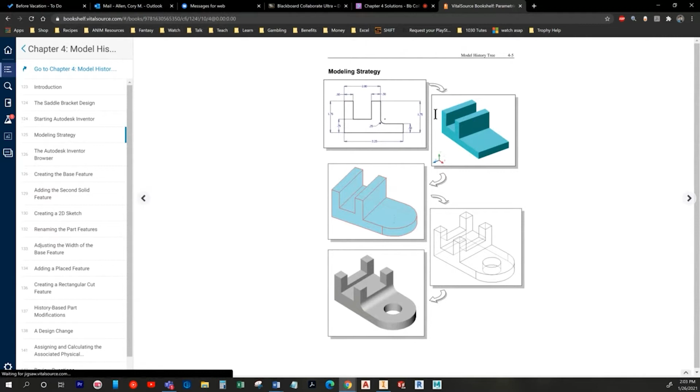We're going to start with this sketch. The fillet won't be there in the original sketch, but we'll end up adding it in later. So first things first, it shows starting a sketch on XY plane. Let's tab between the two here, and we'll start a new part. And now we can start our sketch on XY.

Okay, so let's see what's next here. It just has us draw the sketch. I'm going to draw that profile and then I'll come back and dimension it. I'm going to use this corner as my starting point, so I'm going to tie that into the origin and then draw our rough shape here.

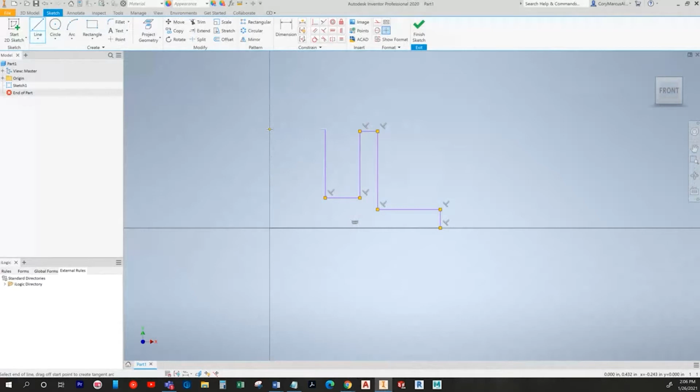So we've got something with a bunch of perpendicular lines, and then it doesn't come down as far. So I'm just going to do that. Unfortunately I made this part really fat, but that's okay. Just make sure it ends where that line ends. And we'll slap in our dimensions.

So we've got 3.25. Bad choice for dimensions, so let's do the overall height. That should scale it. There we go. Okay, so now we can put in that 3.25. And then we have 0.5, 0.5, and 2.

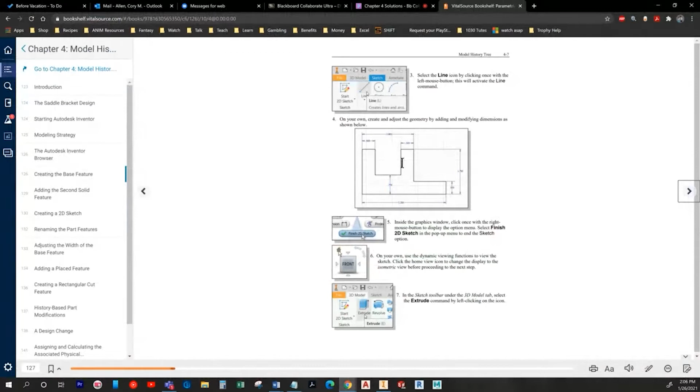And then we have 0.5, 0.75, and 1.75. Now technically, there's no need to have the second value, so I'm going to do a collinear here to avoid that second 1.75 dimension.

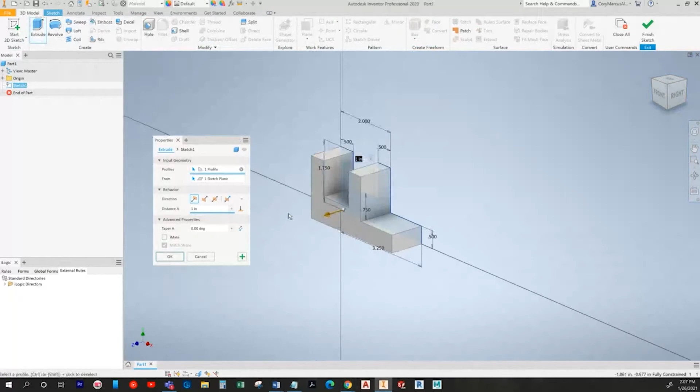Let's go ahead and see what it has us do next. It has us do an extrusion of 2.5 symmetrically. I'm just going to hit the extrusion command while in the sketch so that it automatically picks the profile. Type in our value, hit OK.

Next up it has us do a sketch on the bottom face, so I'm just going to go ahead and do that. Basically we're going to draw a circle off of this edge, and that's all we'll need. So I'm going to hit project geometry off of this edge. I turned it up so you can see a little better, but it's the bottom edge facing away from the other features.

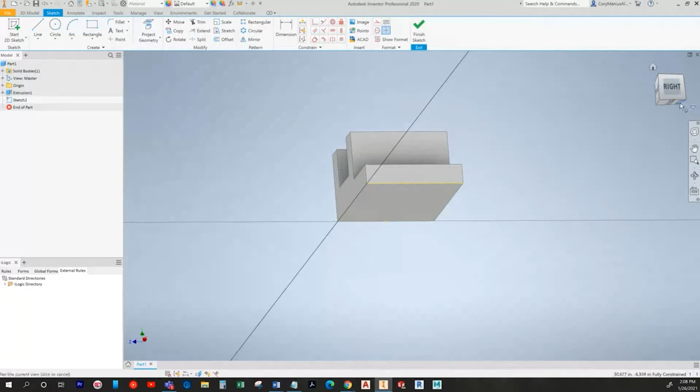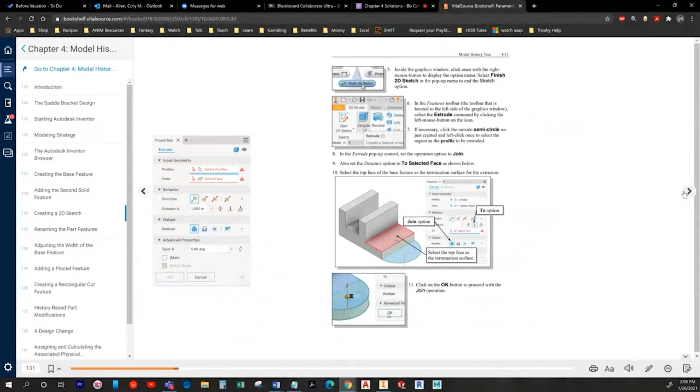Then I'm going to draw a circle at the midpoint where you see that green dot, and choose the other end when I see that other green dot, so it's fully constrained. Then it has us do an extrusion. We're going to do join and to. I'll click back on this so it pops it back over. So we have join selected and then to, and you choose a face and it'll extrude to that face.

So now it's going to have us rename the parts. So we've got base and circular end.

Alright, next we're going to first show the dimension visibility for the base sketch, edit one of the values and then change the extrusion depth. So you right click on base and hit show dimensions. This allows you to edit these values without having to enter the sketch.

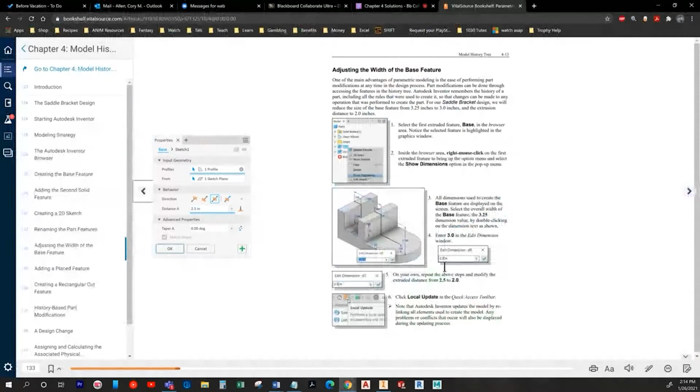So we're going to change 3.25 to 3. Then we'll have to hit update to make it show those changes, so hit that little lightning bolt up top. And our sketch dimensions turn off automatically. Then we're going to change our base extrusion from 2.5 to 2.0.

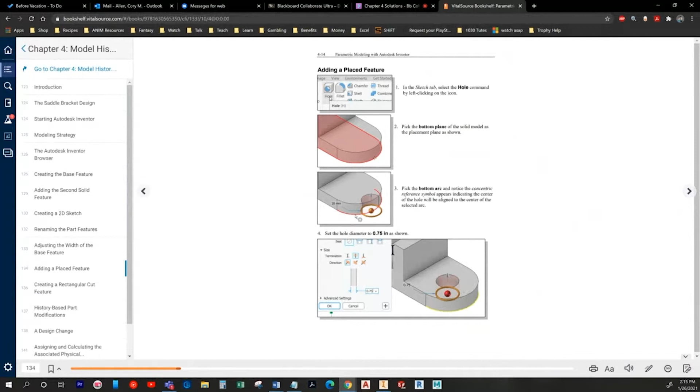So all this is really showing is that you can dynamically update things, which is pretty useful when you're actually getting into it. Next we'll do a hole command, and we're going to choose two references to get it concentric to this other circle: the bottom face and then the edge down here to get that center point.

So we'll choose hole, face, arc, and just like that, it locates itself. And actually our value is already here, so that's cool. So 0.75.

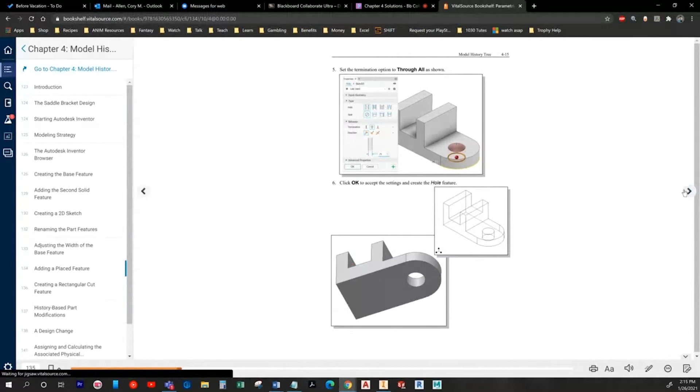And I think our termination of through all was already on there. It was, so there's no need to hit that in my case, but you probably have to hit through all.

So next we're going to draw a sketch on this face, doing a simple rectangle of 1 by 0.75. So I'm going to try to remember that. I'm going to choose project geometry and project this face. We've got our yellow lines. And then I'm going to draw a rectangle somewhat out in space. And I forgot. So 0.75 by 1.

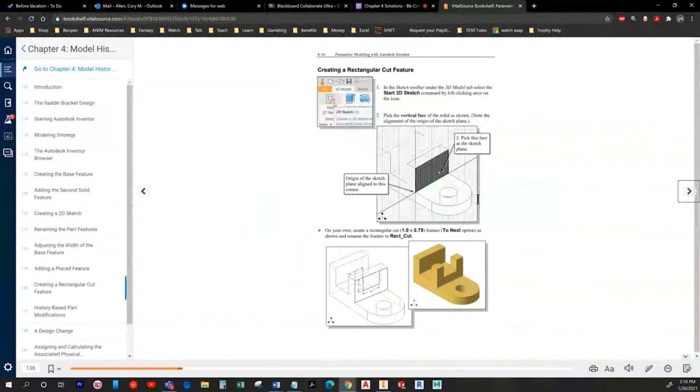And then I'm going to go ahead and slap in this 0.5 value. And then all we need is a collinear constraint for the top line to the yellow top line. We've got our sketch now. And we're going to extrude it using a To Next command. Okay, and I'm going to hit OK, and then we're going to title it Rect Cut.

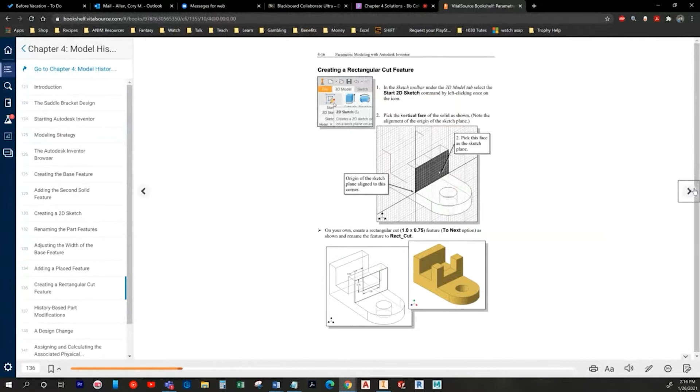I don't think we missed a name for the hole, but we'll see in a minute. No, so it doesn't have a name. So now it's going to show the ability to edit. So I can actually go in and change what I do here by double clicking that feature and then choose through all in this case to cut the rest of it.

So now, for whatever reason, this happens a lot, you may have to go back in and edit your sketch after the fact. And that's just what we're going to do here. So this is the sketch we had to start with. And we're going to modify it to look like this. And it appears the only difference is actually going to be that little fillet we add in. So I'm going to go back into the sketch and verify no dimensions have changed since I'm not reading every word, but they're good.

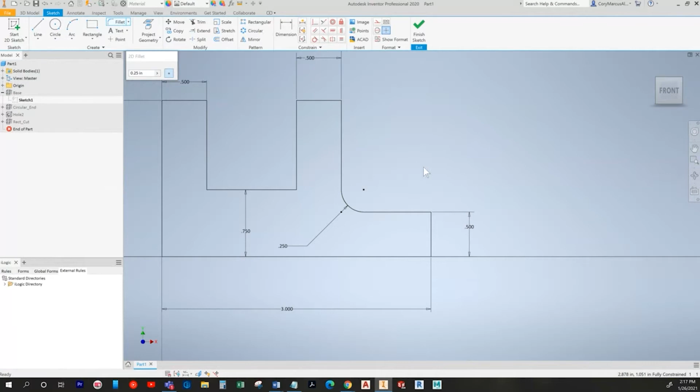So now I'm going to do a fillet. And let's see, that fillet size is 0.25. So let's just go ahead and change that, slap these little clicks in, and there we go. So now I'm going to hit finish sketch, and it's going to update and had that in already.

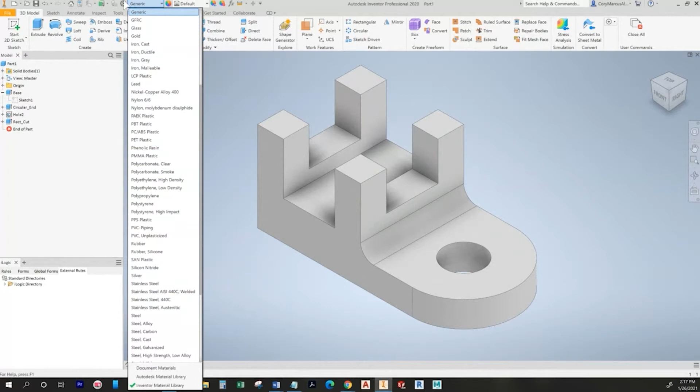So it's pretty straightforward. And the last thing we're going to do is change the material to be cast iron. So I'm going to put it in my ISO view, and you can either choose it from this drop down, or you can actually go into the material browser and select it. But I'm just going to go to iron cast since I know exactly where it's at. And yeah, that'll be it. You would just save it right there.

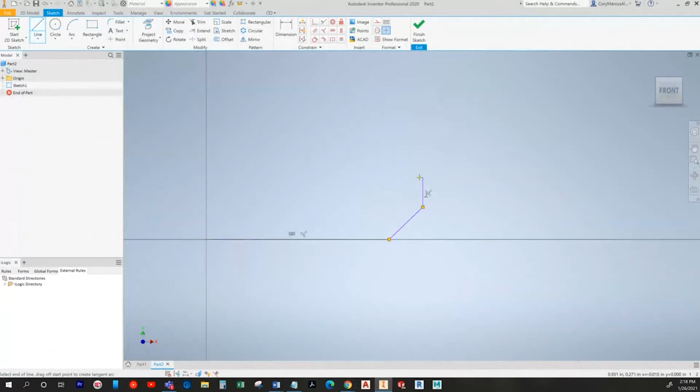So now we can jump over to these end of chapter exercises, and these are a little harder, but shouldn't take too long still. So I'm going to start a sketch on the front plane, and I'm going to draw roughly the shape of how it looks. And I think I'll use this bottom point right here as my starting point. So I'm going to do a horizontal line, slant it up, and I'm always a big fan of drawing it proportionally similar but get the dimensions in later, so we'll just kind of draw as we go.

Okay, so I've got a slant and then it goes straight up. I'm assuming it's symmetrical, so I'm just going to draw the same thing that I see over here. So far so good. Now, unfortunately, I drew it a little bit out of place. That's okay. I'll just constrain it in after.

But you have to really be careful with this one because it's trying to imply a lot of constraints. And when you're doing this, you don't want it to make assumptions about the wrong things being parallel to each other. So this is the only one where implied constraints or inferred constraints can really mess you up. So I'm just going to put a coincident right there for the endpoint and then start putting in these values.

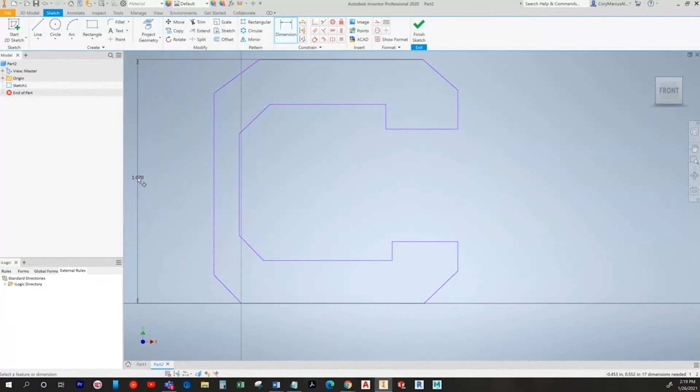Let's try to do the overall height first and see if that scales it for us. You always want to make sure you get that scaling in first things first in case you didn't draw it too close in proportion to what it actually is, and I tend to not. So we have a width and a height of this chamfer. It's 0.25. Same here.

This one's going to have the same width. Technically, I could set these to equal each other, or I could just do like I'm doing here, which is dimensioning it and then choosing the corresponding constraints that match. So basically if I were to go and edit this one, it's going to change this guy up here as well. So by doing this, all I'm doing is I click on a value and it pulls it. So nothing crazy.

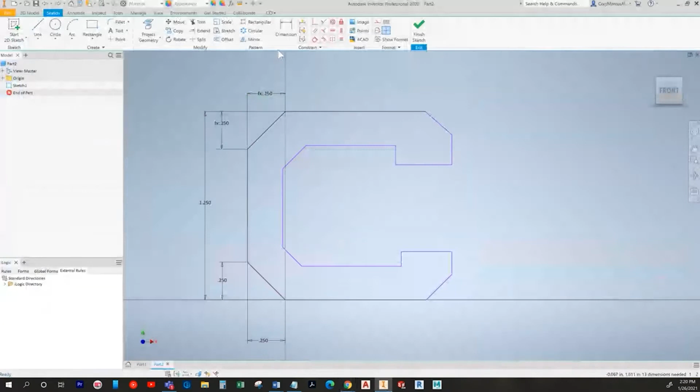Okay, so then we've got 0.125 tall, angle of 45, which is implied already. Sometimes it's going to happen where it has inferred some constraints and you just didn't notice. So same height here. We've got 1.25 from the end, 1.5 overall width.

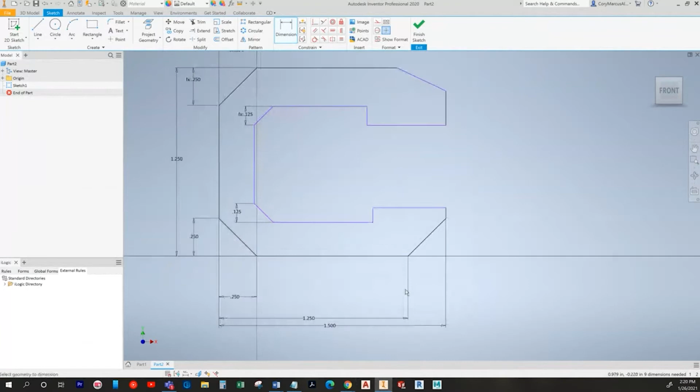0.5. We've got 0.2, and basically all I'm doing is just going through and checking off all my values, making sure I put them in. So nothing crazy. You don't have to necessarily watch every single thing I'm doing here. As long as you're getting in all the values that you can, you should be good to go. So we've got 0.375 here.

Now sometimes if you do have some inferred constraints that have happened, you may not be able to get some of the values in, but you can tell that you need them. And in that case, you may have to delete some lines to get the other constraints in, or whatever. Sometimes you may not know how to edit the constraints you're having issues with, but you need them still. It's kind of random, but we got the 45-degree option here, so I'll take it.

And then I could get a little tricky here. I think I'm gonna do something basic. I'm just gonna set this line to equal this line. And I'm going to set this line to equal this one. Now you may ask, how did he know this? Well, if I were to undo it and grab this line or the point, I can see that it's just adjusting in width, and it's clearly because this line doesn't have a value. So I just need to say that these two match.

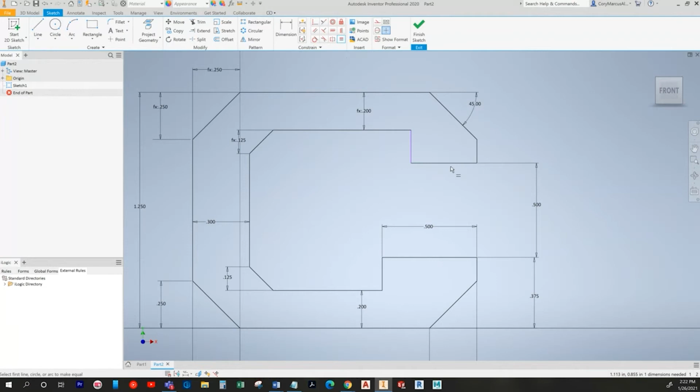And we're going to extrude at 0.25. So I'll go ahead and turn on that feature, do a symmetric, 0.25. There's the first one. And then the tube mount's going to be inches as well, so I'll go ahead and get it started.

Now this is a good time to talk about view positions. So I'm going to draw this L-shaped profile. That's going to be the first thing that I draw in my sketch. But we don't want that to be the front view. We want this direction to be front view. We want to be looking through that hole with this portion in front. So that means I'm going to want to draw on the right side to start with, so that we have the part in a proper position.

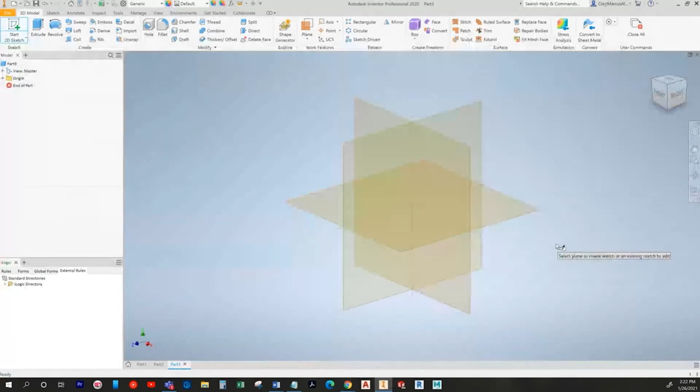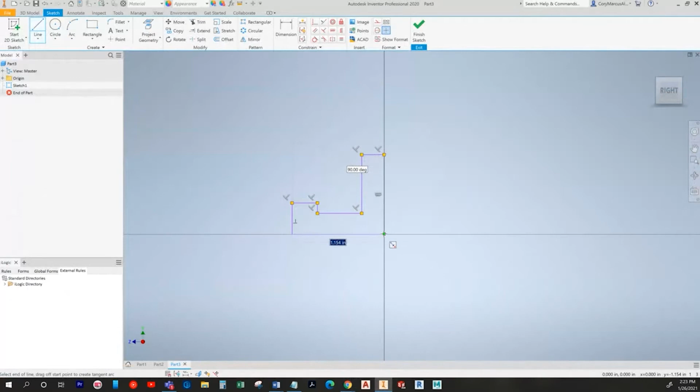Right now it doesn't seem to matter, but it's going to be very crucial to know what view is the front view and what is the side and top and so on. And you want it to be oriented correctly. It'll save you a lot of time down the road. So we're just going to try to keep to that system throughout. So we've got roughly something like this. Maybe a little short, but it should be fine.

Oops, bad click. Wow, okay, so it's going to grow a lot. And it's the same width over here. We've got a thickness here of 1.25 and a height of 1.75, I think that says. Let me zoom in a little bit. Ooh, it's still hard to tell. Kind of looks like it could be a 3 too. Let me just get in here a little closer.

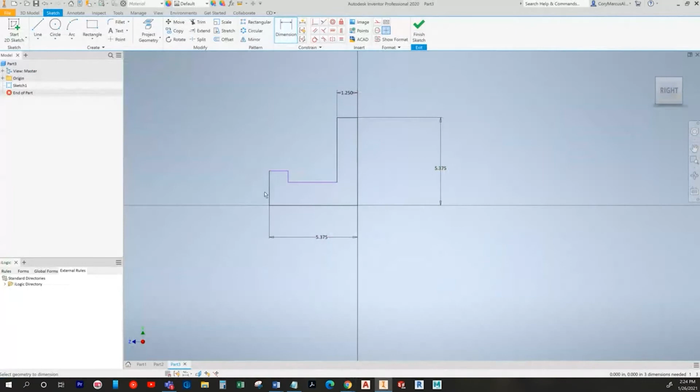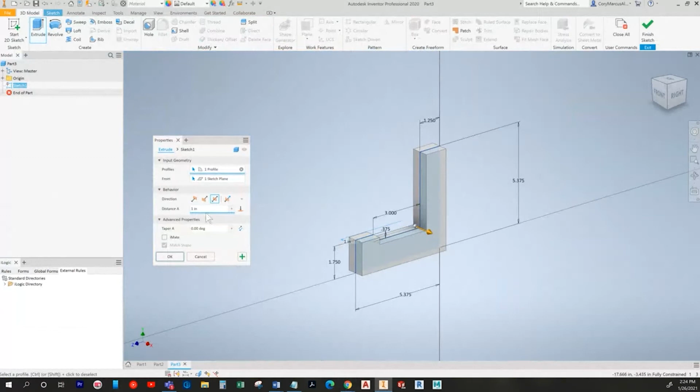This is where the perk of having an ebook helps. Okay, so it looks like a 7, kind of a really poorly made 7. Let's just put everything in place and see if that fits right. So it's 0.375 down right here, and we're missing a width of this top portion. Okay, so it's 3 from here to here. So let's go ahead and extrude it, and we'll just see if that looks right. I think that this is probably the right value, but it's hard to tell until we get into 3D. So we're going to do symmetric 5.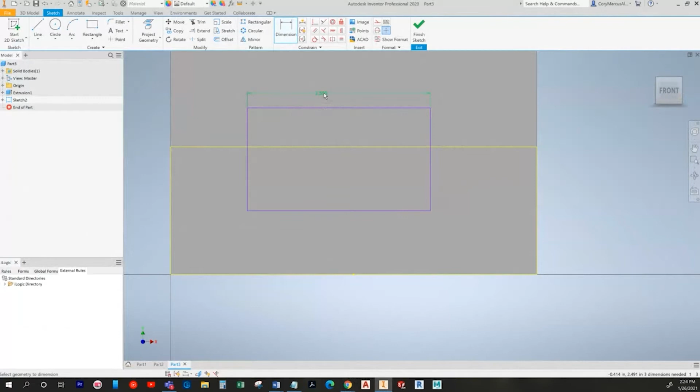And let's draw this little rectangular cutout here off of this face. Same deal, make sure you're projecting that geometry so that you have something to tie this into. And the rectangle is going to be 2.5 by 0.375. And it is centered. So in this case, what I would prefer to do, it's one of the only times you could really say it's worth doing, but we can tie these center points together. So I'm going to do a vertical constraint for those center points, and then the collinear, and we can extrude it.

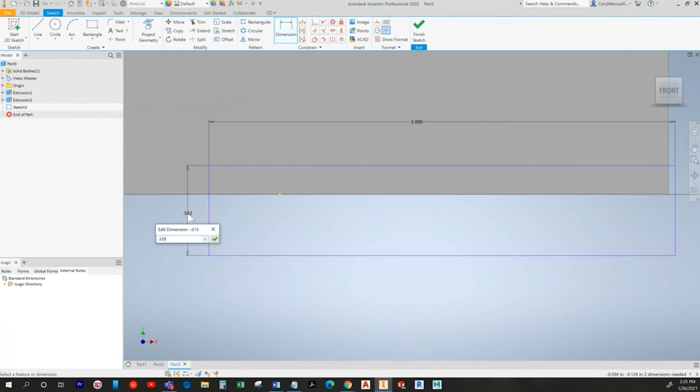All right, project this bottom edge. Do a collinear, and it's centered again. So we're going to do a vertical constraint from the midpoint of this line to that little midpoint of our projected line. Do an extrude cut through all.

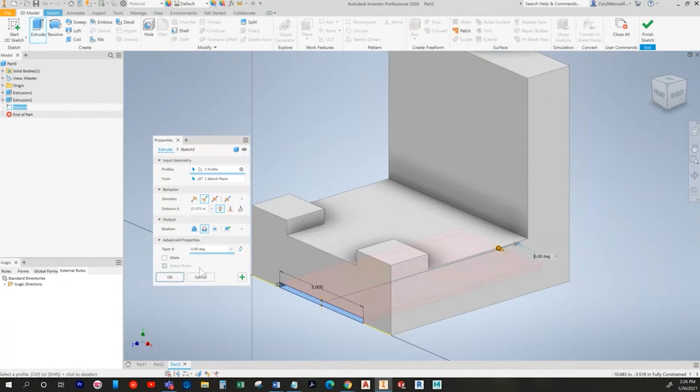And yeah, I think that height was correct earlier. So we're going to roll with it. It appears to be a 7. I mean, it's not easy to see there, but you get the point. Okay, so we'll do a hole. And it is centered and 2 down. So I'm just going to grab a dimension so it projects that edge for me. And then we'll just do a vertical constraint to line this up.

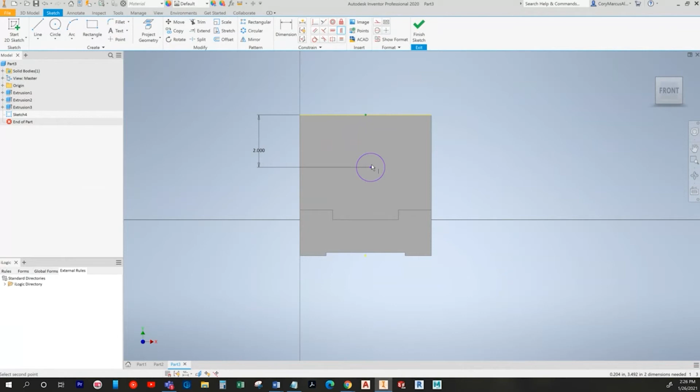Give it a value of 2. Extrude it. And the only thing we're missing now is some fillets of 0.5. Oh, and I missed one right here. So let's go ahead and edit that feature back. Click that edge.

And it looks like that's going to be it. But I'm not very happy with this height. Let me go back and check that. See if it would look better with 1.35. No. Okay, so it is 1.75. It's just hard to tell. It's always good to go back and fact check. Okay, so yep, let's move on to the next one. Let's zoom this back out too.

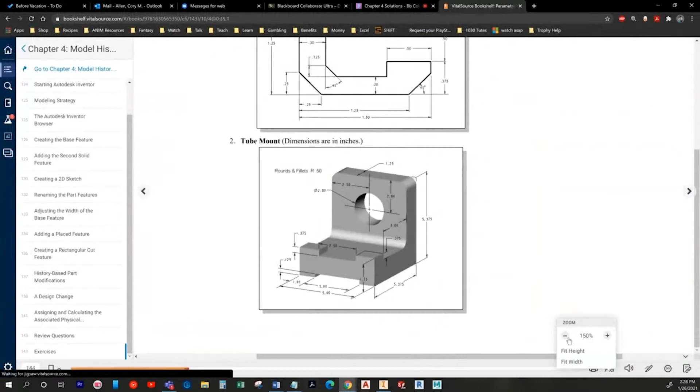Okay, so up next is a hanger jaw, and we're going to draw with this being the front view. So actually that's going to be the sketch we start on. Looking at this, I'm going to draw everything in the side view except for this top little portion if I can avoid it. I may not be able to, in which case we'll just draw the zigzag, and we'll add in the arc and the cut later. So let's go ahead and start it.

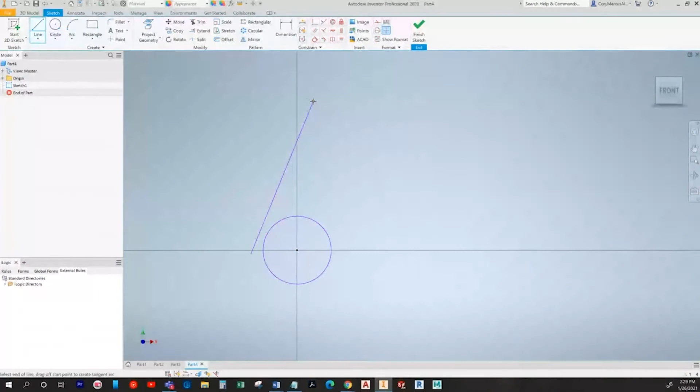First of all, I kind of want to use this circle as our starting point, as for what's going to be in the origin. So I'm just going to slap in a little circle. I don't tend to connect the geometry till later, and that's fine. So for now, we're just going to ballpark this doodle here. And actually, this line should be connected. So I'm already kind of off base here. Let me just pull this straight up.

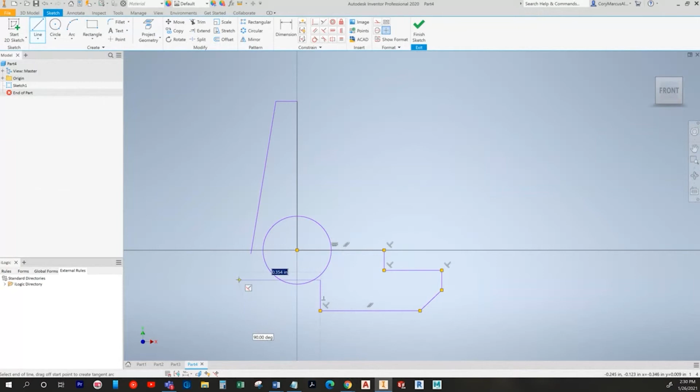And then we're going to do that little step down I already said I didn't want to do. And then from there, we're going to have this bit and a little landing. What we need to have here is a little line. So let's connect it, make this a little more clear what's going on. And I did miss the fillet up here. That was actually by choice. I'm just trying to tidy up where I can to start with. So I'm going to trim everything into place and give it that rough shape. I know it's not perfect.

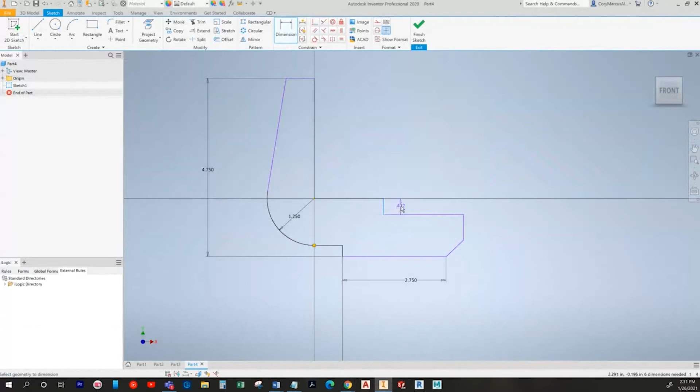And then let's give it the overall height so we can start forming this to what we want it to be. Whoop, bad click. Trying to put in that 4.75 height. Okay. First things first, let's put in this value here of 1.25. Let's put in the overall width here. Well, actually, we'll put in these two. So we got 2.75 and 0.75. And we have 0.5 here. And here as well. And then it's 2 to here. Oops, put something wrong.

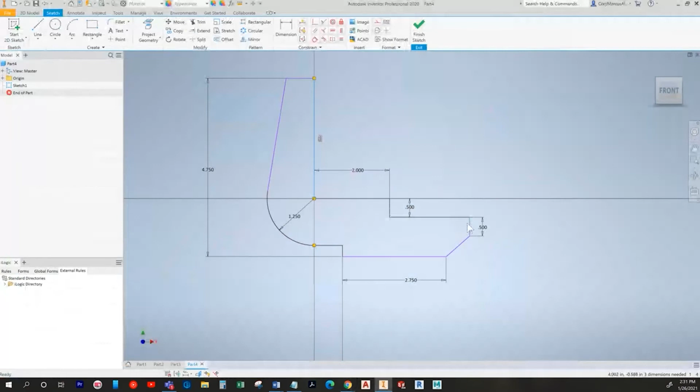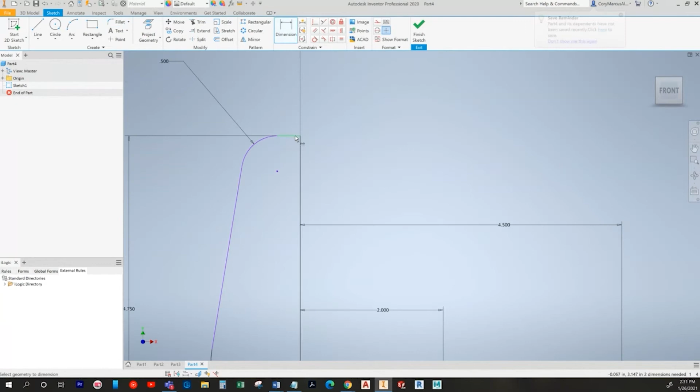All right, so I was trying to avoid putting in the fillet earlier, but we're going to have to put it in the sketch, so that's okay. We're going to put this width first at 4.5. And then the fillet size itself is 0.5. Whoop, I clicked something wrong. Okay, so this flat portion left over is going to be sized at 0.25. We have a height for this line at 3. And just like that, it's fully constrained. Sometimes it comes together quicker than you'd think, but usually just filling in the values is enough to get her in place, as long as you're drawing with your inferred constraints in the right place. So we're going to do a 3 width.

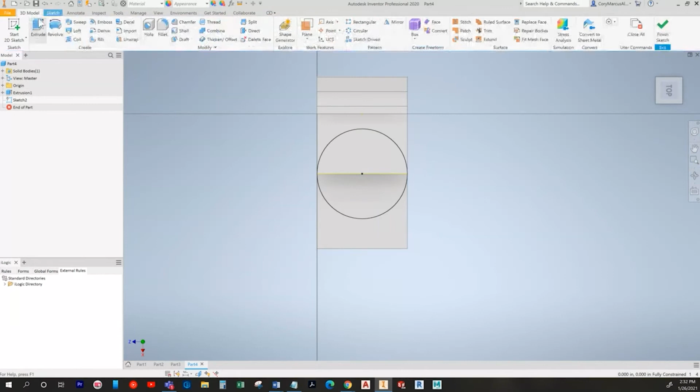And then first things first, let's go ahead and put in our little arc here on this top face. So I'm going to project this edge, and I'm going to draw a circle, making sure I snap to that green mark on both ends. And I'll go ahead and extrude it. To next. Then I'm going to turn on the hole command, choose this face and this edge, and let's see what the size is. 1.5.

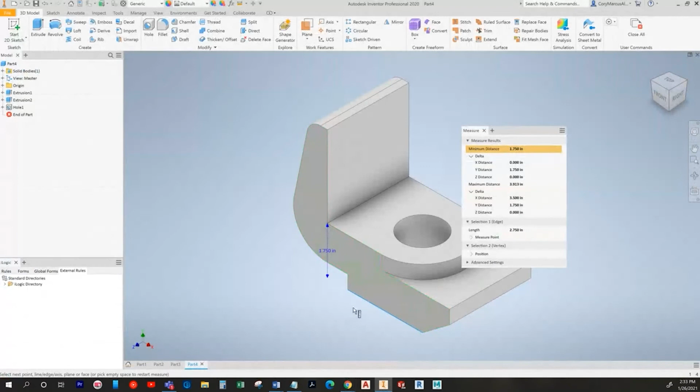Okay, so yeah, I don't know, it seems a little long to me. Let me just double check that. So I'm going to measure 2.75 and then 0.75 to here. Yeah, okay.

Looks fine to me. Okay, so next up is a transfer fork, and this one we're going to apply a material when we're done. So I'm going to start off with drawing this face here, and then we'll kind of cut away at it a little bit. So I'm going to draw roughly what it looks like.

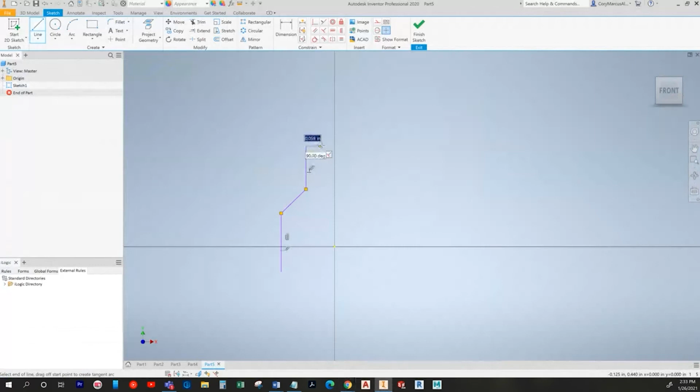See how it's trying to imply all these perpendiculars and angles to this? Just try to avoid the dotted lines if you're having issues. You can also just quit out of the sketch, and that helps too. So now I'm going to draw that circle, and the circle is actually going to be the center that I use. So let's go ahead and do some constraints here.

Oops, wrong spot. I've had a lot of coffee, so I'm a little jittery.

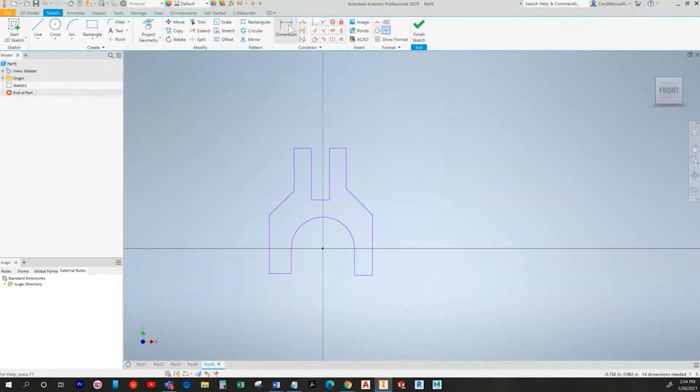Alright, so we've got 3.5 in height here, I believe, but let's just start over here just in case these are not symmetric. So we've got a radius of 1 and 0.75. Oh my, scaled a lot. Thank goodness that worked. Okay, so we have 0.75. It's easier just to go ahead and set this line to equal this one, so that you don't have to do a collinear here later.

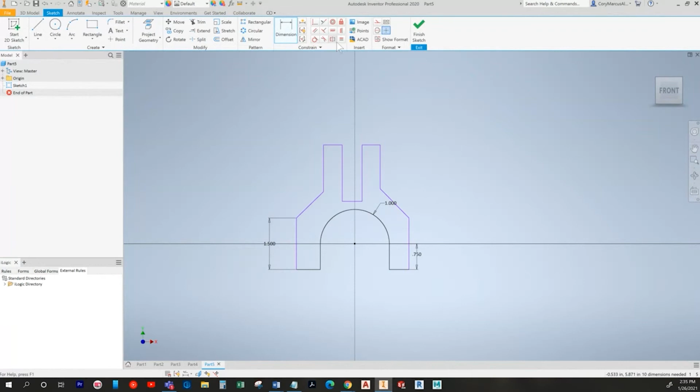We have 1.5. And again, set this side to equal this side. You know, the part's symmetric, so you don't have to have 2 sets of dimensions for everything. And it's 1.25 from this edge to that hole and from the cut to the hole.

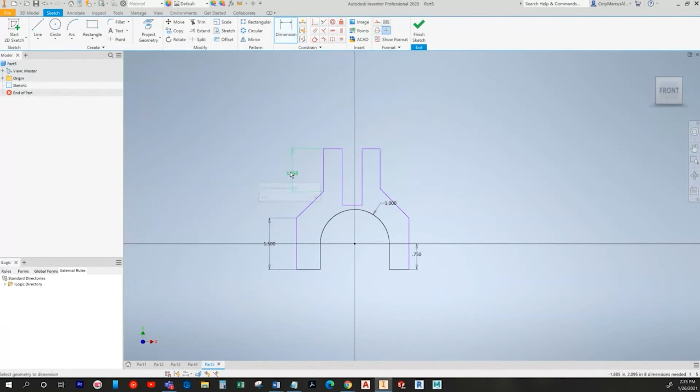So from that, I'm going to actually draw, you know what, no, I'm going to actually just draw this block portion here. So I'm going to actually just put this as 1.25. And then because we know that the line is in line with this point, I'm going to do a coincident for the line to the point, and then a horizontal constraint for this line point to this line point.

I'm going to go ahead and make the thickness here 1.75 overall. And I believe it was 0.75, yeah, between them. So now I'm going to say that this line equals this one so that it evens out. We've got an overall width down here of 3.5. And the bottom width is 0.75.

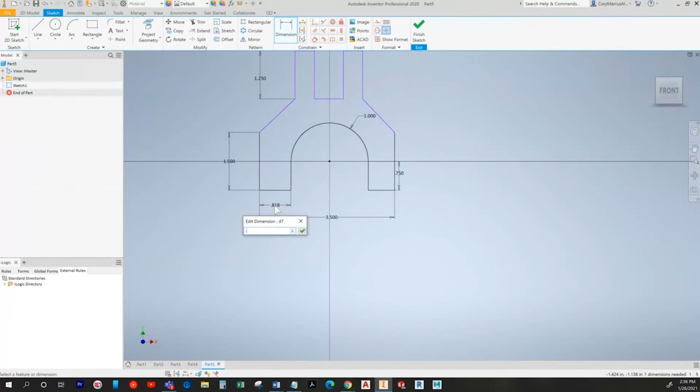So let's see, we're missing an overall height of 3.5. And that might be it, actually. It is, okay. Whoa, what happened here? You know what? We don't need it. That's the problem. Okay, so in a case like this, if it jumps, you just need to say that these two lines equal each other, and it should jump in place. But just to be safe, I'm going to measure that 3.5. That's wrong. Okay, interesting.

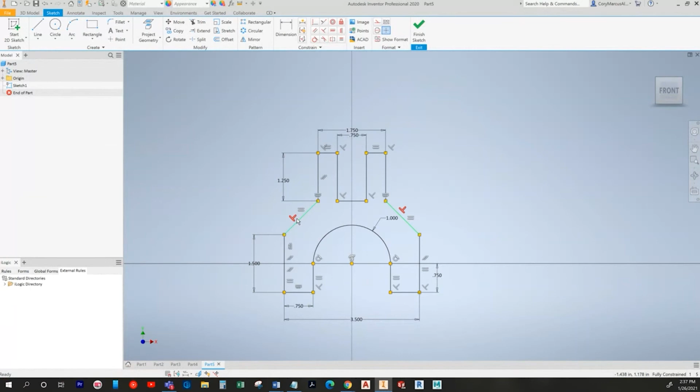Let's see, so if it's 2.25 down, maybe I put something in wrong. So we got 1.25 from top to edge, 1.5 here. I bet you what we have is an implied constraint. Yep, that's exactly it. See, this is what I always worry about. So it has actually implied a constraint on its own. So if this happened to you, hit this, turn it on, and delete a perpendicular if present. It actually made this line and this line perpendicular to each other.

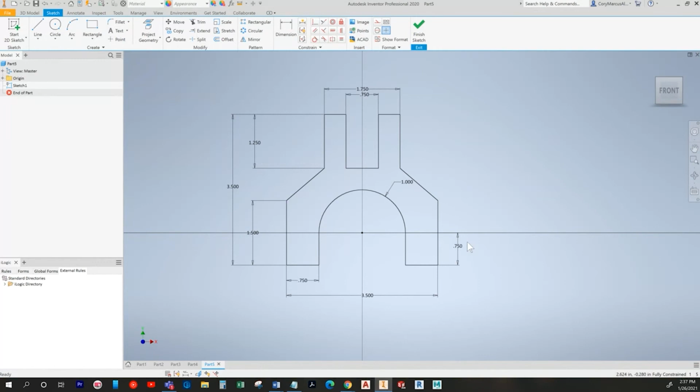So now we should be able to put in that 3.5 and have no issues. So that's a niche problem, but that's exactly what I was talking about. We really have to watch the inferred constraints sometimes. They can get you. So we'll extrude at 5, symmetric.

All right. I'm going to immediately try to knock out some easy stuff here. And this is going to be the fun part because if you guys didn't draw this on the same planes and directions as me, it's going to be a lot harder for you. So I'm going to start with drawing a gigantic rectangle here, and I'm going to hit Slice Graphics, cut our part in half. So this rectangle that I'm drawing is to cut this out. So it's aligned to this edge here.

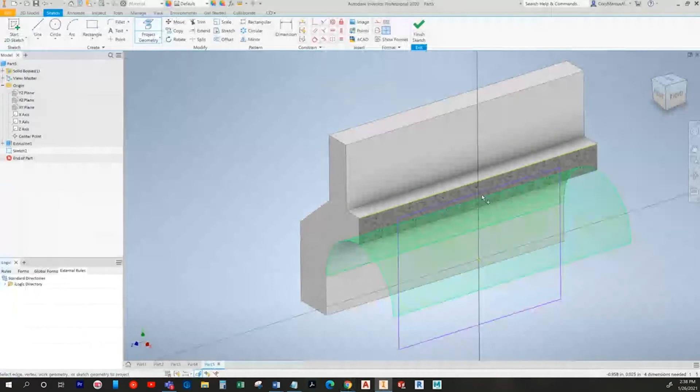Now it's kind of hard to tell what's going on here, so I'm just going to turn the part so you can kind of see what I'm doing. But it cuts on this angle. So I'm going to just project this edge, and yeah, it's 0.75 here, so I assume it's the same here. So 1.5 minus that, it's a 1.5 rectangle. So I'm going to give it a width.

I'm going to project this bottom edge, and I'm going to do a vertical constraint locating this. Actually, I think this is one of those times where I watch when I choose the point. It's hard to see, but do you see over here a little bit? It's actually showing horizontal lines. This is one of those times where, in my case, Inventor is being a jerk and putting it backwards. So in this case, I'm going to choose horizontal in order to go vertical and align this.

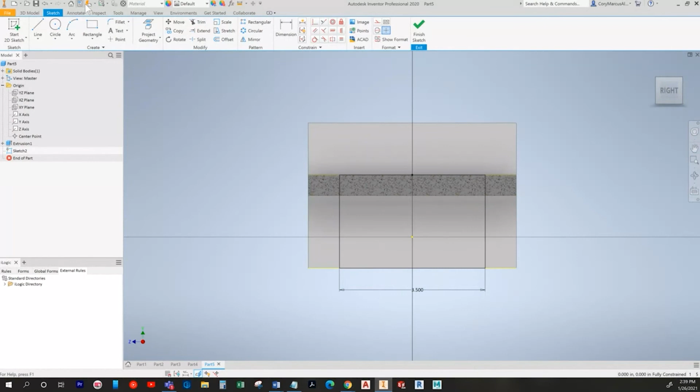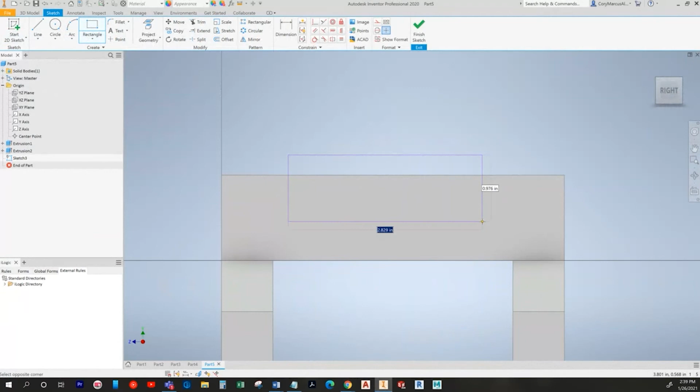Then I'm going to do collinear and a collinear down here. And there we go. It's sized up, so I can just do an extrude through both ways. All right, so now it's starting to kind of look like something. So let's see, we're going to need a rectangle up here as well. We can go ahead and do it. And it's going to be 1 wide here and 1 here. So this is a rectangle of 3.

Same concept, project your edge. Do a, hopefully, yeah, so this time it actually is vertical. I'm telling you, I don't know why Inventor has never gotten better about that, but this is a recurring issue. I just need to give it a height of 0.5. And then we can cut it. All right, so now it kind of looks like it. And we can draw in our circle.

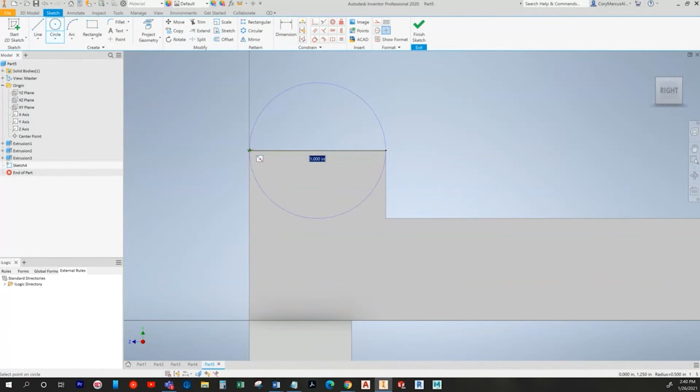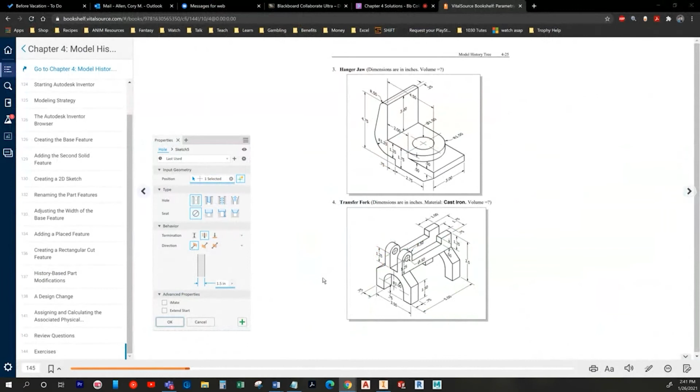Now this part, this is where I was referencing if you didn't draw it the same way, you're going to be in a little more trouble. So I'm going to draw, get my green points, make sure everything's fully constrained. I'm going to extrude it. When I do To Next, it doesn't want to pick it up. So that's fine. I'll just do To and click the face manually. And then I'm going to go ahead and do a hole. Choose the face and the edge. And then scale it down because it's gigantic. It's going to be 0.5. Not through all. We want it to do To in this space.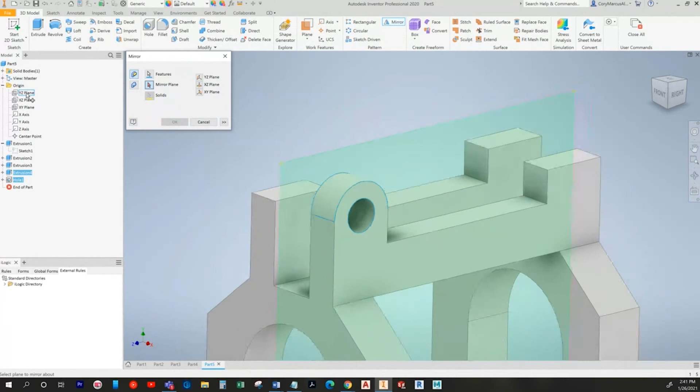So here was the fun part. If you didn't draw this part with this sketch in the middle, now you can't do this next trick. You'll have to do the same thing on the other side or make your own plane in order to get this located. But all I'm going to do now is a mirror. And I'm going to choose this feature and this feature, click on mirror plane, and choose our plane that cuts through the middle here. And it's going to duplicate that feature over here. It's pretty cool, you know. But if you didn't do that, you may have issues.

So one trick you could do is do a mid-plane between 2 planes and choose, you know, 2 corresponding parts on one side. And that'll give you the plane to use. But obviously, it's advised to draw your sketch where I did to start with. So anyway, it looks like that's pretty much it. Only thing we have left to do is put iron cast on.

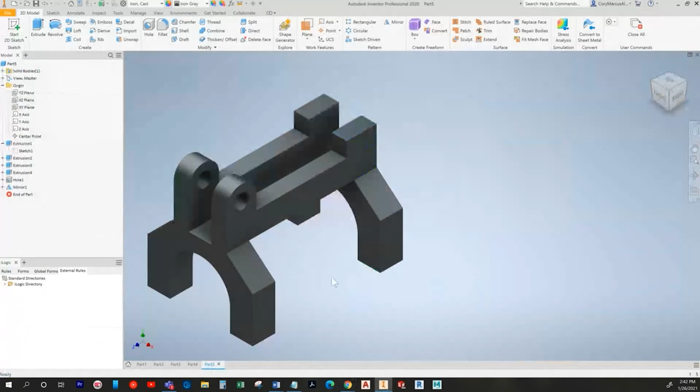And then, you know, if you're feeling a little uneasy, I always kind of feel weird about these parts because they're so intricate. I'm just going to measure it. So we've got 0.5 here, 1.25 there. Yeah, I mean, it looks good. Okay. So, you know, that's pretty much it for that one.

So up next is the guide slider. We're kind of past the harder ones now. So we're going to draw this as our front view, and it's also going to have a material. So first and foremost, let's draw that shape. And I am going to use that circle as the middle, so we'll start with that. But it's not a perfect circle. We're cutting off part of it as we go. So let's go ahead and put that portion in.

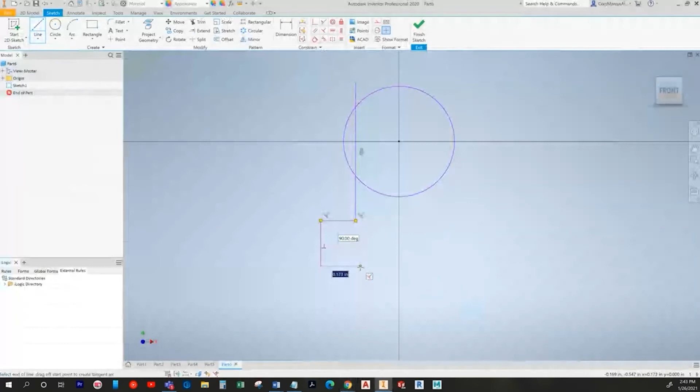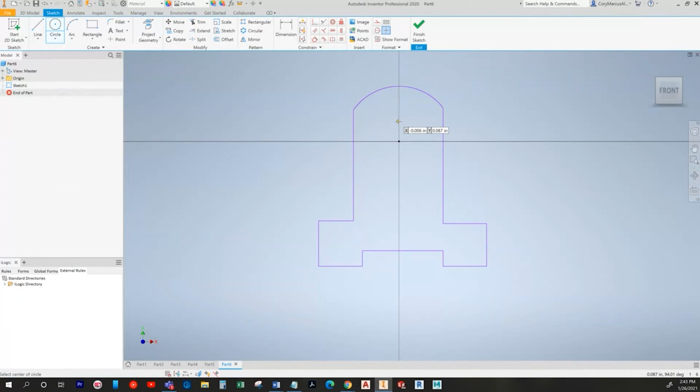And don't assume that those are in line. Just draw a random offset of that. And that's okay. That one ended up going crooked, but I will fix that later. Okay, so put in a perpendicular. And then I always think it's better to trim these before you go trying to, you know, dimension the sketch and make it scale. But I'm going to put the circle in. Might as well have it in place, but I don't know that it's going to be concentric to this other circle. So I'm just going to draw it out here in space.

So first things first, this width is 4. That may not scale it, so let's do 3. I think these 2 circles are concentric though, the more I look at it. So I am going to do it. Put a concentric constraint on them. If it ends up not working, we'll delete it and play with it in a minute. So it's 2.5 to the middle. It's 4 right here. Oop, I hit a button. That's okay. If yours, like mine, moves out of the way, just kind of shift things over a little bit. 1.5 tall.

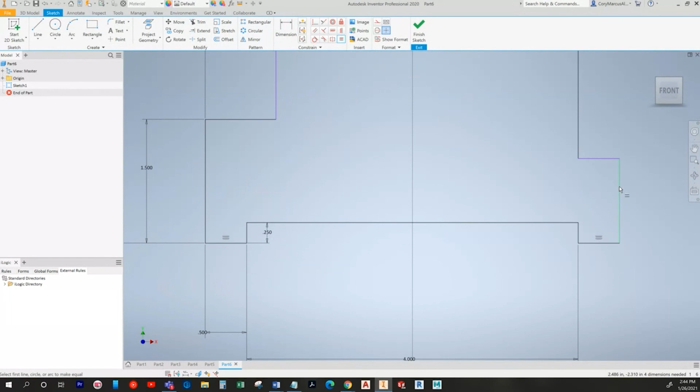.25. 0.5. And then we're going to set some lines that equal other ones. So this line equals this one. This one equals that one. And let's see, diameter 4.25.

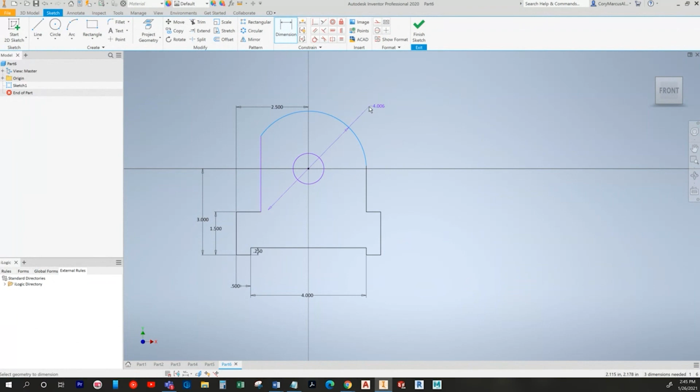Now it sucks that it does this because technically that should be a radius value. So it's going to give you a radius value to start with. So we're going to change that to diameter by right-clicking and choosing dimension type and choosing diameter. Anytime you have a partial circle, it's always going to start with a radius as its dimension type. So now I'm going to set this to equal this, and that'll center it up.

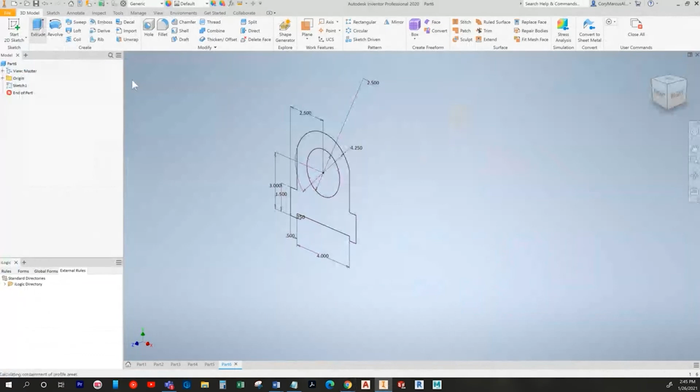And then our other circle is 2.5. Okay. It does appear that it was concentric. So I can go ahead and extrude it. 1.75. Symmetric. Make it cast iron. And there you go. It's not too shabby, actually.

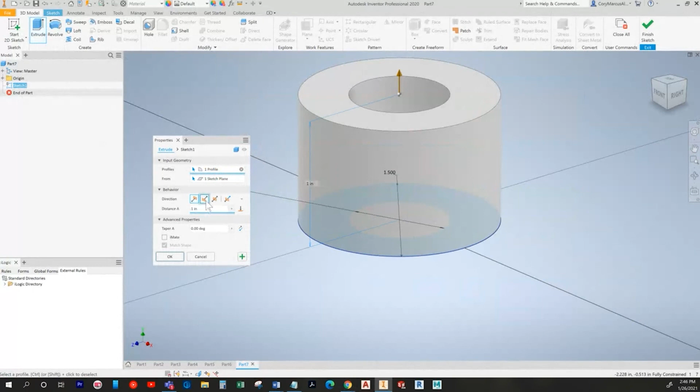So now I'm going to choose to extrude off of this top face a rectangle. So I'm just going to draw a generic rectangle here, give it its value of 1.75. And 0.6. We can go ahead and put our circle here too. And it's going to be centered. And 0.4 off the edge. 0.25 in size.

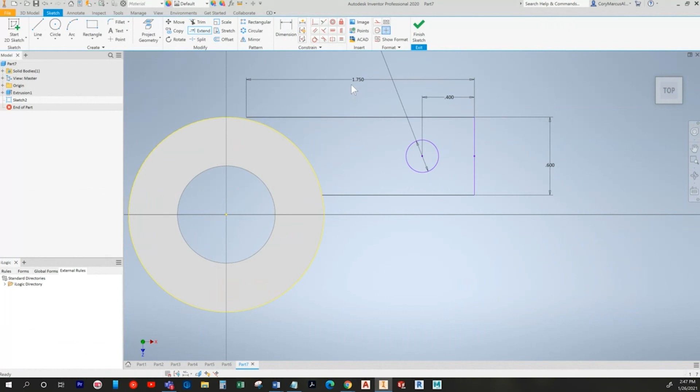So now I'm going to go in, project this geometry. I'm going to slap in a tangent for this part. I'm actually going to delete this line entirely. And then I'll go ahead and trim this line. So now I just need to extend this line to touch that one. This is one of those fun times where it sometimes makes you delete constraints, but I guess I could have done this probably. Let's see, that might have worked. So instead of trying to extend it, I'll just do a coincident from this line to the circle.

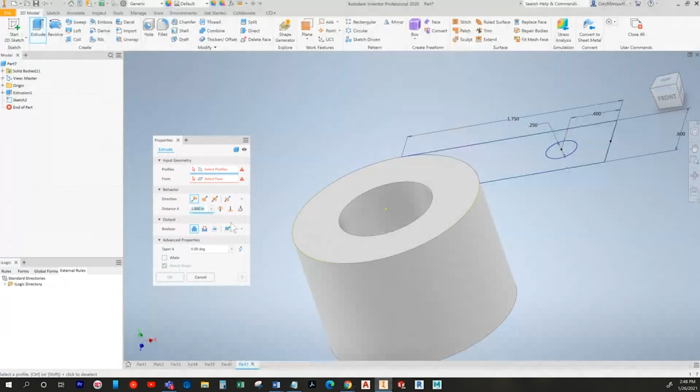There we go. Okay. I could put the fillets here, but I have a strong stance of putting them in as a feature later. It's a lot easier to change. So we'll go ahead and finish, extrude, and what's our size? 0.25. I'm going to go to the same direction, and then we have that hole.

So the perk of doing the circle in the middle earlier is we can just do a sketch right here, and we'll have a nice projected point to do our circle. And it's going to be 0.25, and it's going to be located 0.5 from the bottom. So now all we got to do is vertically align the center point to the center of the circle and do an extrude cut the other way.

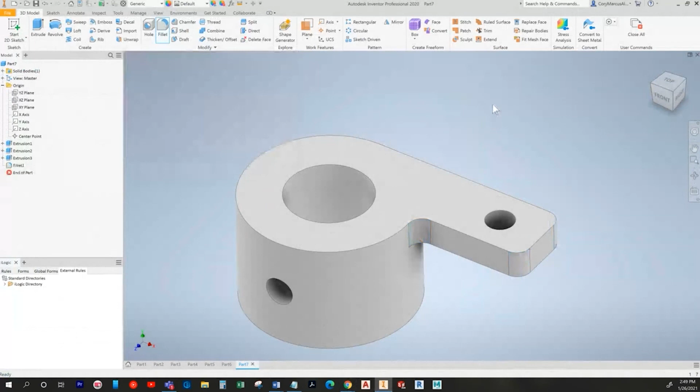And then we need fillets of 0.125. And it defaulted to that. Yep. Okay. Now, just for the record, in case people were curious, I'll show you the difference if it was through all both ways. You would see that hole. So there's your proof, in case anybody's wondering. All right, so let's change it to aluminum 6061. Yep, and that's going to be it.